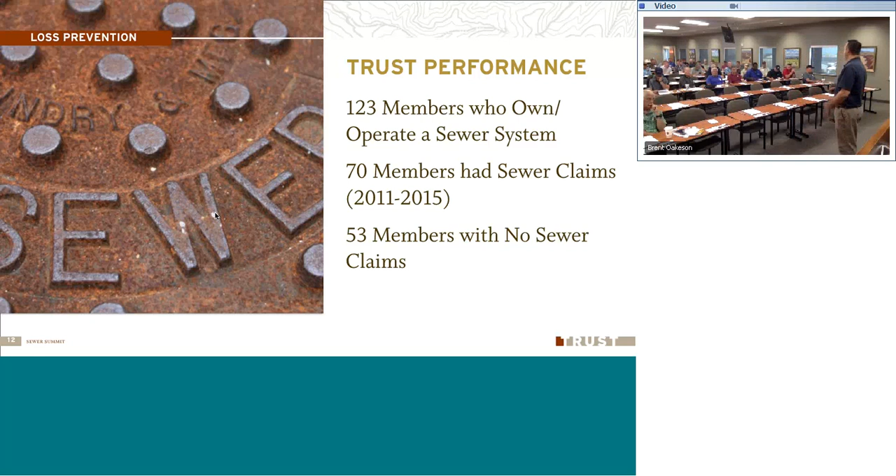So that's kind of the focus of our training today - what has been done and what we do going forward. Looking at performance last year, 2015, there were 37 sewer-related claims.

Again, that's across cities and towns, could be large systems or small systems. There were 37 in 2015, and in the last 5 years there was 148, which averages out to about 30 per year. So on average it's about 30, which means in 2015 there was maybe a little bit more than average, but we'll look at that.

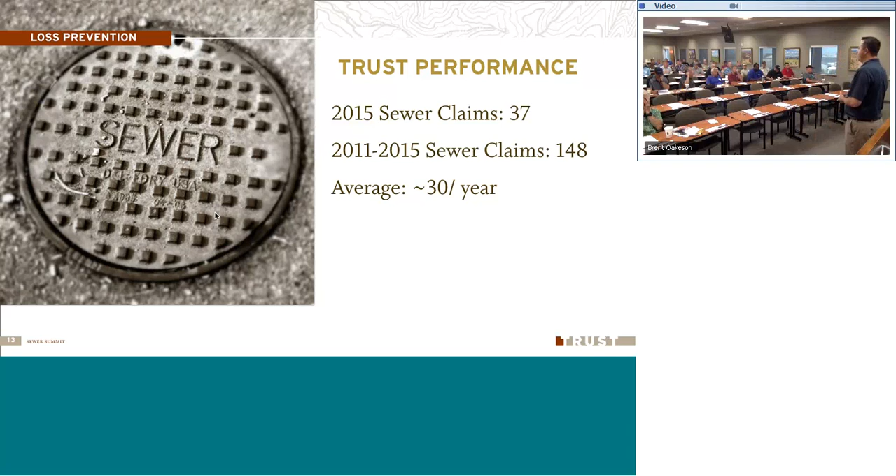There's some other positive things that came from last year that we want to learn from as well. So that's just an understanding of what's happened across the state, what people are doing, some averages there. What we looked at is we took this information and examined it.

Now, how can we base it on - if we have a member that has a really small system, and then we've got say a large service district that has hundreds and hundreds of connections, how do you compare between the two to make it all work? So we decided to divide it up per 1,000 connections, which normalizes the information, kind of averages it out so you can compare how many backups per 1,000 connections.

So in the last 5 years, there's been 0.72 as about the average that we've had there. And you look at 2015, it's 0.18. So 2015 was a big improvement for the averages - did really well in 2015 for those trends.

We also broke this out into miles of pipe. Some cities have more miles of pipe, and others have more connections but not as many miles of pipe, so there's some variance there as well. We found that in the last 5 years the average was 0.048, and in 2015 it was 0.012. So again, it was a better rate in 2015 for preventing types of backups.

So just some general information for you to think about. Think about your systems where you work, the backups you may have had in the past year, maybe some in the last 5 years. Think about those things you can do to prevent and what's there.

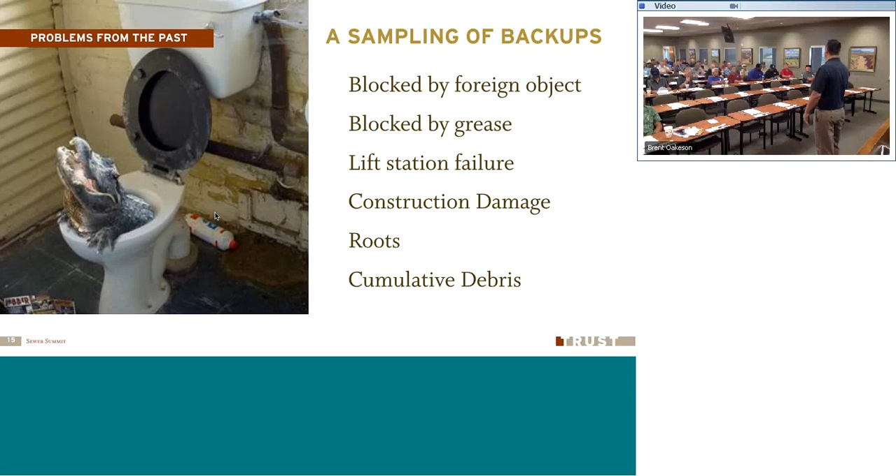So here's a sampling - we're looking at the data, looking at things there. We had blocked by foreign objects, things getting into systems and blocking those. Had some blocked by grease, lift station failures, construction damage, even roots getting into the lines, busting up the lines, blocking things, and then cumulative debris - several things getting into the lines. That can come from anywhere, whether it's a construction job, somebody accidentally put something into the line, or maybe a homeowner put something down that's blocking things up and causing backups. There's several reasons, but these are all examples of what goes on that leads to sewer-related claims. So those are things we want to watch for and learn from.

All right, a little quick video here.

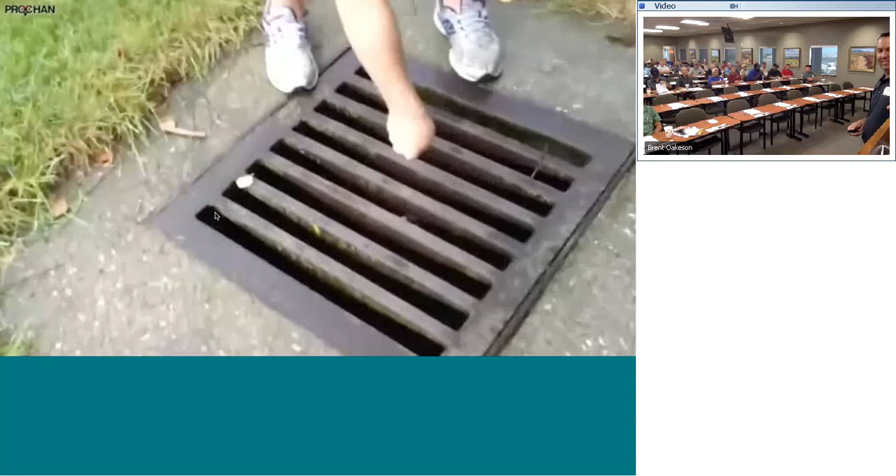So, bass fishing in the storm drain, right? Okay, good time there. You never know what you might find in your system, what people are putting down there. Toys, other material, construction debris, maybe some bass or trout. You never know. Who knows?

So we did this survey I told you about last November. We sent this survey out, had some things going on. We wanted to get this to kind of compare and see what's going on. What are people doing? What best practices do they have? Are they in compliance with the SSMP and all the things that they're doing?

We got 111 results out of the 123 members. So we took that 111, broke it down, put it in a spreadsheet, and compared based on number of connections, miles of pipe, how often they're inspecting their manholes. We looked at all this information and the trends as compared, and I'm going to break that out now for you.

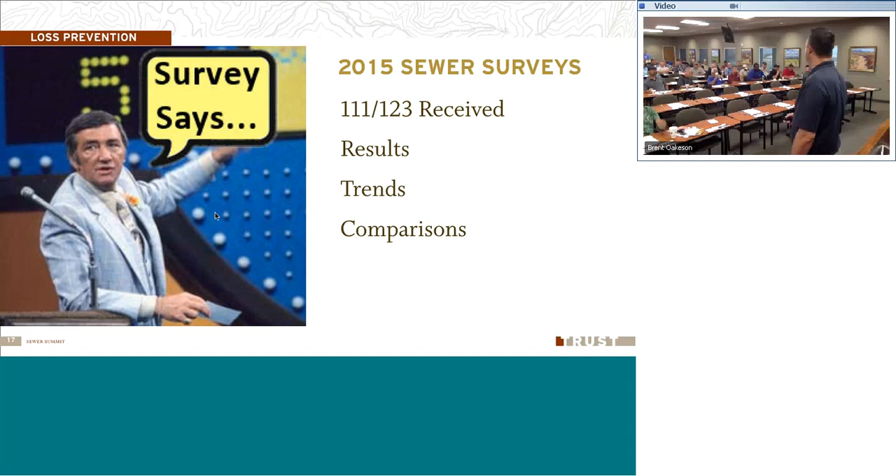So the survey says, just like Family Feud, we'll show you what the survey says here - some trends and some comparisons.

So we looked at it, 111 surveyed, those who turned this information in. We found there's 5,827 total miles of pipe, a lot of pipe across these entities. 343,383 connections, 7,198 commercial connections, 208 lift stations, and 125,185 manholes. So there's a whole bunch there when you think about all this information.

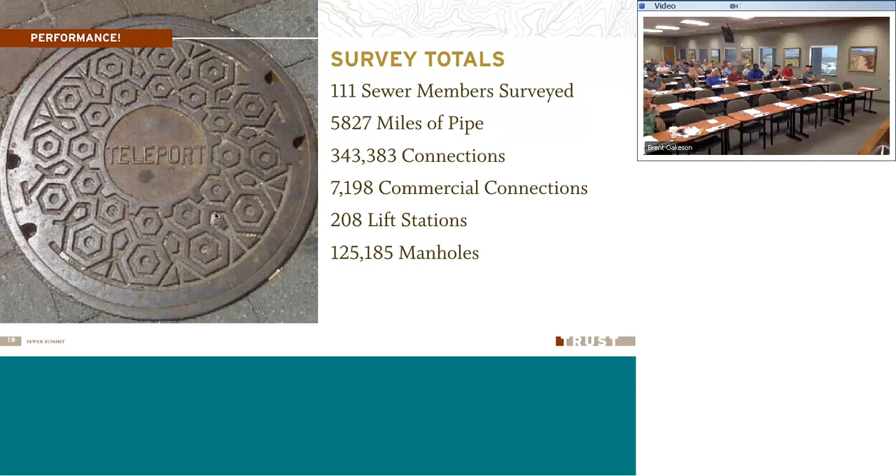So we've gathered this survey, and it's really covering all these numbers from the groups involved. That's where our survey is coming from. We encourage you this next year - we'll probably do another one of these surveys to keep this going. We encourage you to take part in this and help with this survey because we can learn from that, share things and learn from some best practices. So that's the totals we had for our survey.

Looking at the results, manholes inspected here: out of 125,000 or so, we had about 90,185 that were inspected last year. That's per year, averaging out to about 71% per year inspecting the manholes.

Now why do we emphasize this? Why do we want to talk about manhole inspections? Really, because if you're opening that lid and looking in there, you're going to have a much better understanding of your system. That's one of the best practices we want to encourage - keep that going. If you're able to get into every manhole every year and identify any problem areas and back it up, imagine how much time and hassle that might save you. You're going to have less losses, less issues, and your system's going to operate better. So we encourage you to make sure you're doing that to keep those inspections going.

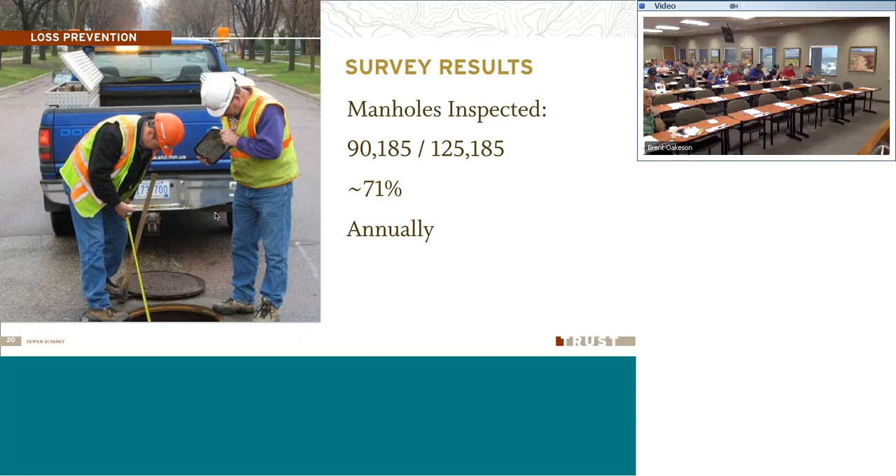So that's the result there - doing pretty well, 71%, that's a pretty good average getting into every single year.

Okay, other results here: average sewer cleaning frequencies. We found the average agency is doing about 3.92 years to get through the whole system and clean it entirely out. Some, being a smaller group, might be able to do it every year. Some larger systems do maybe a third of the system per year. As we talked with some of these members, that's what a lot of them do - a third of the system each year, so on a three-year time frame they're getting in, cleaning their lines, getting those things out. We encourage you to look at that too - look at the frequency of your cleaning.

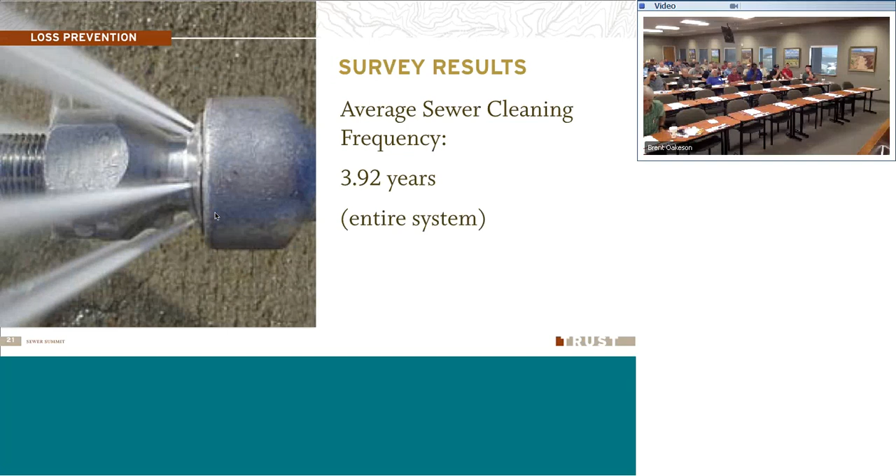If there's any way to improve that, to increase that amount, to keep those cleanings going, that's obviously going to help with preventing losses as well—keeping the lines open, keeping things from getting blocked and backed up. Okay, so that's our average there, 3.92 years for the systems.

So who's doing the cleaning? We asked this question too. About 50% were doing it as the agency themselves—they have their own equipment, manpower, it's part of their system to do those things, and that was good. About 50% also have a contract. There's good things with that, and also some negatives. The negative is you have to pay somebody else to do it, but they may have the right tools and do things correctly, saving a lot of hassle. So think about whether you want to do it on your own or contract it out.

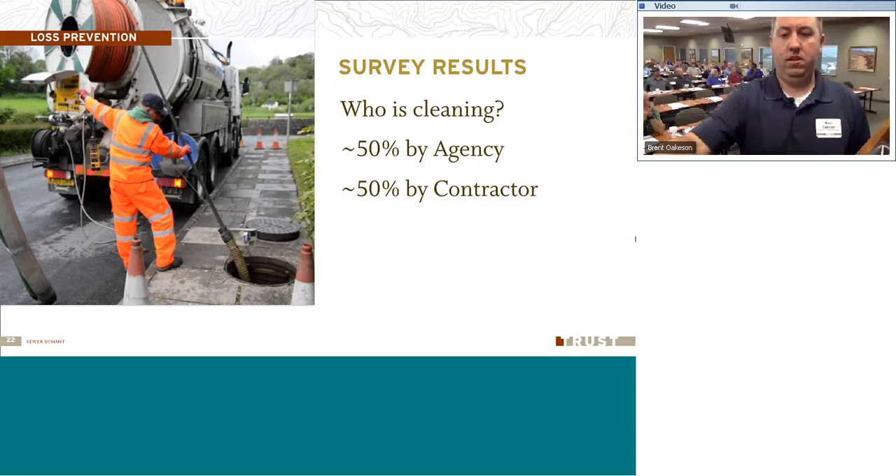Survey results: we also looked at agencies and whether they have their own equipment. Out of the 111 that responded, 83 said yes, they have their own equipment—they're able to respond, they have a procedure in place, they know who to call, they have equipment on hand. How great is that? If you can increase that response time, get a call, and jump in with your own equipment instead of calling somebody else and waiting for them. About 75% of the entities have their own equipment. Good things there, good practices.

As far as adopting the SSMP, how many had that in place? We looked at 2014, and about 34% of entities had it all in place at that time, with different dates and cutoffs for compliance. We did really good this last year—about 79% had all their SSMP in place. This was in 2015, 88 out of 111. I'm sure now it's even higher, with new dates coming this year. It's good that you've got your plans in place for preventing backups and keeping your system going.

Okay, how about report cards? Think about the averages, the things others are doing—so many doing inspections, so many doing cleaning, and how long it takes to clean their system. Think about your own systems: how often are you doing it? Are you getting into all your manholes every year, or cleaning one third per year? Can you increase that? Think about all these things and how you can improve them.

So how do you stack up against the averages? We looked at this in the past few years and sent out loss performance information on your system. We can send these out as well—we'll put together more information to send to you, which is why we'd like your emails for attendance. We'll send you information so you can see the trust average across the state and how you're doing as far as miles of pipe, size, frequency, claims, and losses. We can compare all that so you get a snapshot of where you stand, and we'd encourage you to look at things you might need to improve to prevent losses and backups. So again, put your email down there.

So with this, we did these surveys like I talked about, and we took this information and put it in a spreadsheet to compare. We looked at what people are running into as far as root causes of things. What's causing these backups? What's causing these claims? We sat down with some of those entities and wanted to look at the percentage of backups they're having, what's causing the problems, and what we can do to share with others. So in this next section, I'm going to talk about that a little bit.

What we found is that the groups we met with were in compliance. They had their SSMPs in place, they had a program, and they had good practices. We also found some root causes that I'll share with you.

A lot of times it's the budget. They're trying to get the budget they need to buy equipment, to have the manpower, to be able to increase inspections or increase their cleaning. Obviously it costs money, so that was one thing that stood out to us. If you're a decision maker, or involved in approving these things, if there's a way to increase inspections and best practices from a manpower and financial standpoint, we recommend you do that. We've seen it help people's systems, keeping them going with less backups and less problems.

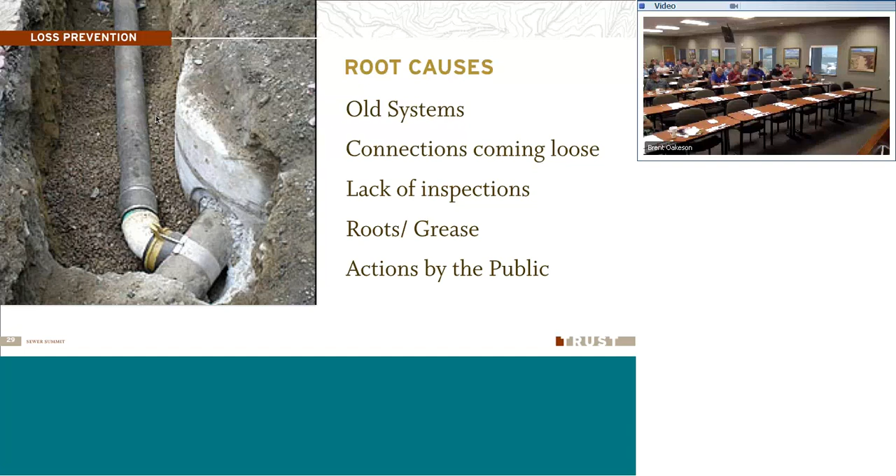Maybe there's a possibility that you can do a newsletter, some kind of memo or something out to those people that are in the system to keep things from backing up and having problems there. Okay, those are all things that we learned from talking through things there.

Even connections just coming loose over time. Maybe they weren't installed properly, coming loose and having them there. Anybody ever see the baseball or softball in the lines? You never know what can get down there and cause a lot of problems.

So action plans, we talked through this. We talked to those members and said, all right, so here's the root causes. Here's what you guys are having going on. What can be done to try to prevent these types of things?

Purchase new equipment was one of the recommendations. Whether it's cameras, backup response equipment, whatever it is, have the right equipment that you need to do the job there. Increase your cleaning and inspection. We talked about that. That was another one where we had a group. They were going to increase them this year and get that going more.

Address your problem areas. A lot of times there's certain problem areas. Maybe you get a belly in the line, maybe the way that the system's tied in and the flow of everything. There's certain areas that can back up more often. There was one group that talked about hitting this problem area all the time. They go there regularly, more often than any other time in the year, because they know in the past they've had certain problems.

So when you're looking at your backups, you're looking at your claims, are you finding things in the same locations over and over? If so, look at those areas. Try to address the problem areas that you constantly have those things going on.

There was some cases as well where there were backups where they didn't have a part of the system. Maybe their maps weren't up to date. Maybe it was on some property where they didn't know where the manhole was, maybe it was covered up, maybe they couldn't find it. But there's been backups from that as well. So being aware of your system, having your maps up to date, knowing where all the manholes are, those are all things to take part into to prevent backups there.

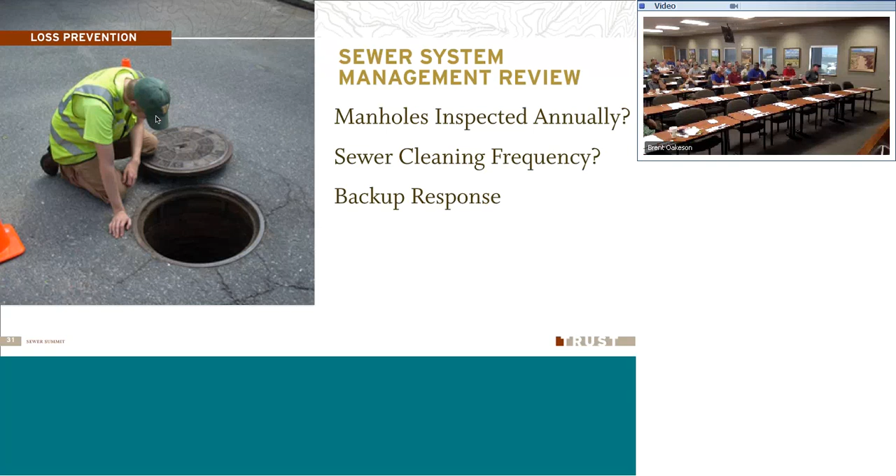And then we talked about the reminders to homeowners, being aware, creating that awareness for everybody, so everybody's aware of what's going on. So a question, are your manholes inspected annually? How much sewer cleaning frequency, what is it? What's your backup response, who do you call? Thinking through these things and all the procedures that we have and the equipment, taking time to think about that can really prevent a lot of claims and issues down the road.

We have Kim Shelley from DEQ who's going to talk to us today about what you need to know now, what you need to know about compliance, having your plans in place, being in compliance there. Let's make sure that we have that going, so we'll have some good information there.

Train system operators. Is everybody current? Do they have their certification? Any other training that they need? Is everybody current there to keep that going?

What about adequate capacity? Is your system capable of handling the possible capacity that could be there? If you have an elephant-sized flow coming through your system, you want to make sure that your lift stations, your piping, everything is all there so that you don't have those backups and problems.

Frequent inspections. Are you doing those frequent inspections? Is your map up to date? As we've talked about, those are all things to think about for your systems there.

So when it comes to incidents, when you have a backup or some type of loss, maybe property damage, what are you doing about it? Do you just take care of the problem and not think about it, or do you look into it? You try to find out why. Why is something going on? Why are we having these backups?

This happens with any incident investigation, whether it's a car accident, an injury, or any type of thing like that. We encourage people to look at it, take some time and dive into it, see what's really going on there.

Find the root cause of why things might really be happening, because it could be part of the system, it could be part of your practices, or part of what you're doing on a daily basis that might be causing these problems. So find out why when it comes to that why.

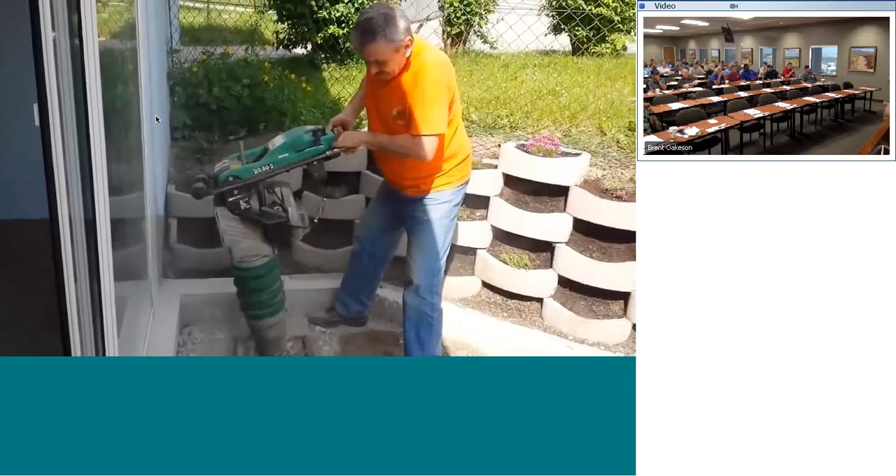Didn't work out so well for him, did it? That is absolutely real home video. Don't drink and operate equipment.

So some of you might have seen this before - this is our manhole inspection manual. Raise your hand if you've seen this before from the trust. Okay, got a good number of you. Some of you haven't. We're going to be sending this out. If you want to put your email on the sign-in sheets out there, we'll send you a copy of this after.

I want to highlight some information from this - there are some really good guidelines in there. We put this information together from several different entities to help us out, and we appreciate them sharing that information to help us identify things we can share with you. It helps you see what to look for doing your manhole inspections - different conditions, different things to look for - and it points that out with some pictures, which is very helpful.

Looking at conditions, knowing how to look at your adequate flow - how do you determine that when you open the lid, what are you looking for there? We've got some other definitions and best practices of things you can use. It's a very good training tool, something you can share with your staff, maybe for a new employee new to working on the system - some good information there that we can share with you.

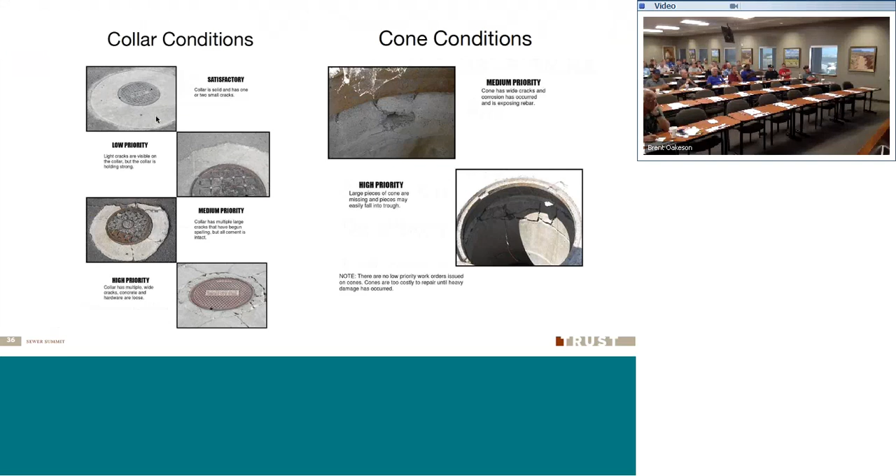So these are some of the pages that come from that. The one on the left here shows the collar conditions, with different pictures showing what's satisfactory, what's a higher priority, what's good, what's bad. It kind of breaks that out. We'll send you a copy of this that you can look at and share with others.

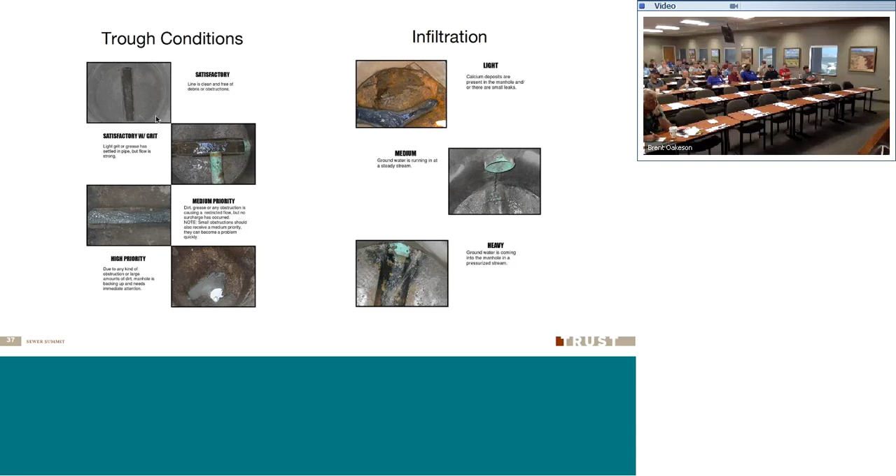Also cone conditions, looking at things there. Trough conditions, looking at what's priority, what's with the grit, what's a big concern, what's not so much of a concern. You can use that as a guide to know should we be taking care of this now, or is this something we can do maybe six months or next year. It's helpful as a guide. Looking at infiltration, and other things like that.

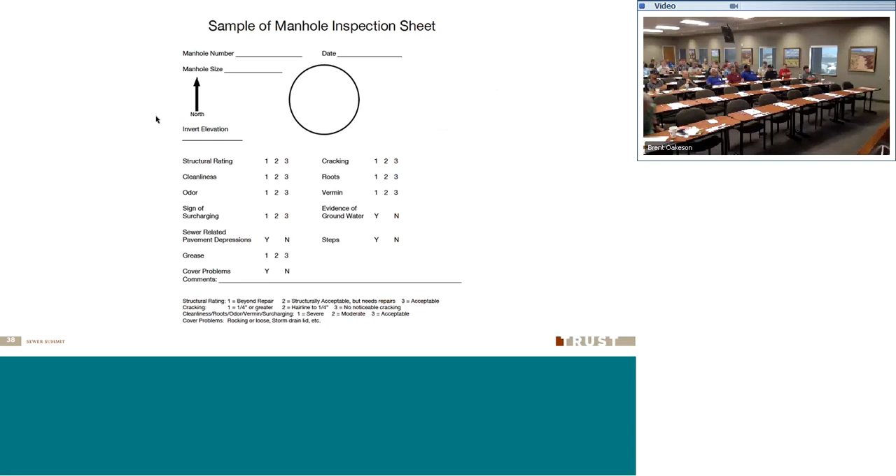Again, it's really good information. We encourage you, if anybody ever comes across a new practice or something that's been really effective for you, maybe a really good idea for your system that can apply to others, we encourage you to share it with us. Maybe we can get that out and share it with others, and hopefully help each other prevent losses and claims. Really, we're in this together. Our organization is here to help serve, and it's everybody that takes part in this to prevent claims and losses. So if you have something, we'd love to partner with you on that and share that information.

One of the keys is know your system. Know where your problem areas are. Know where your manholes are. Make sure you're doing those inspections. Make sure things are up to date and continually going. And be proactive with it, right? You want to be ahead of the game, proactive and stay ahead of the issues there.

Make sure your maps are there. Make sure you've got the equipment and things you need to successfully do that. Make yourself a plan, you've got your SSMP, those are in place. Let's make sure we're sticking with that and following through on those requirements, sticking to those procedures to keep those things going as well.

Look at your backup response plan. Use preferred providers, you've got those providers with possibly better pricing for preventing backups and cleanups. So we recommend using those preferred providers. Maintain your system, the cleaning, the TV, the cammering. Make sure we're doing that on a schedule, keeping up on that to prevent losses.

And then lastly, train and certify your operators. That kind of summarizes all the things we talked about.

Again, it's really up to every organization to manage their own system and do their own things, but we're here as partners. If you have questions or if you have best practices that we can share, that would be great. We'd love to share that with others and keep those things going.

So with that, a summary: we talked about what the averages are, what people have done this past year within those surveys. We encourage you to take part in that each year, and we can share that information and get more information out to others as well. So we appreciate your support on that.